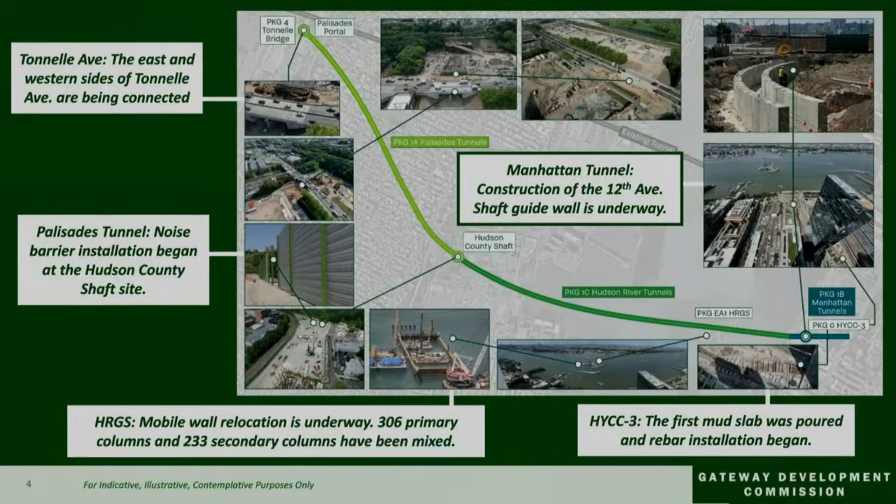Moving across the river, we come to the Hudson River Ground Stabilization Project. Relocation of the mobile wall within the cofferdam is nearing completion, enabling the team to access a new section in the riverbed. In Manhattan, the HYCC 3 team is wrapping up construction there.

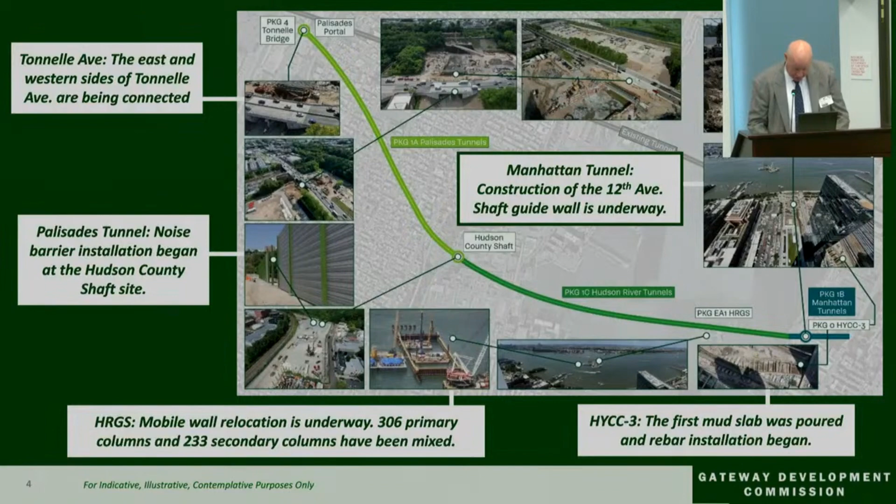Tunnel boring machine. This is an interesting part of the presentation for those of you that haven't been able to see a tunnel boring machine. We are rapidly approaching the start of tunnel boring for the Hudson Tunnel Project. With this major milestone on the horizon, I would like to use today's progress update to explain how these massive, complex machines work in building a tube tunnel and the process that will lead up to the start of tunnel boring next year.

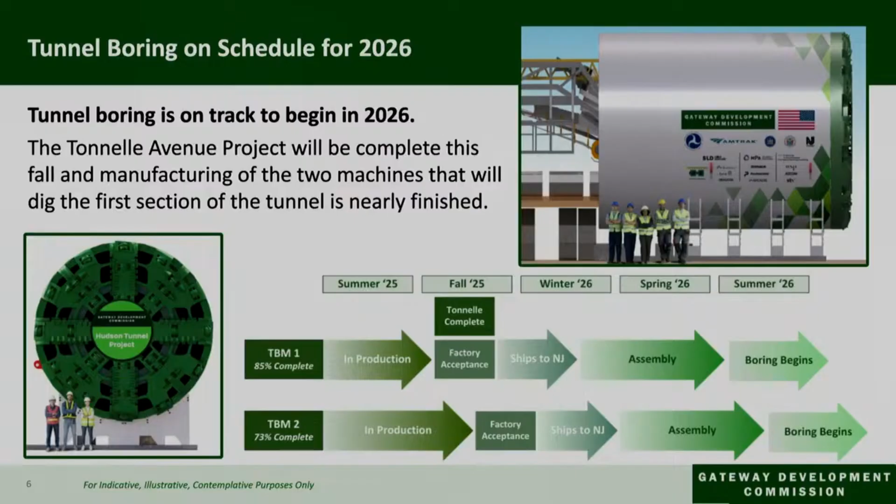Looking ahead, I am proud to say that both TBMs will be manufactured in November, and we are on track to begin tunnel boring in 2026. The first machine is now 85% complete, and the second machine, which will be offset by 200 feet, is 73% complete. These are massive machines, as you can see here, the characterization of the people standing next to them, because you don't get a feel for the size unless you actually stand next to one.

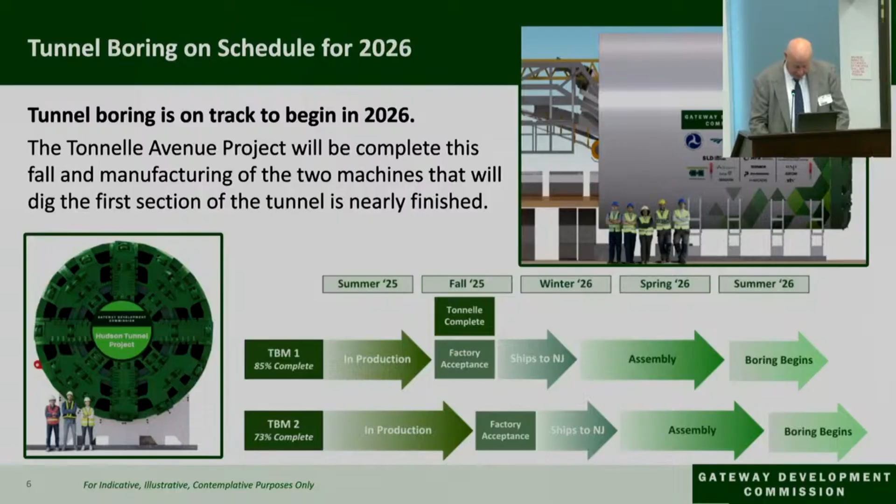The first of the 2 TBMs will be ready for launch by next summer, and the second will begin boring soon thereafter.

We are using single shield tunnel boring machines for the first mile of tunnel boring. This means the front of the TBM is a single continuous cylinder. This is the most efficient use of TBMs for boring through dry, hard rock conditions, like the rock underneath the Palisades, where the New Jersey section of the tunnel will be built. We will use 2 TBMs that are optimized for digging through a variety of conditions that we'll encounter under the Hudson River to dig that portion of the tunnel.

These machines are massive and extremely complicated. The Palisades cutter head is more than 28 feet in diameter, and each machine is longer than a football field, and they weigh more than 1,600 tons.

The size of the TBMs mean that they can build quickly. On days when the TBMs mining is underway, roughly 30 feet of tunnel will be built. At this rate, it will take about a year to complete both tubes in the Palisades.

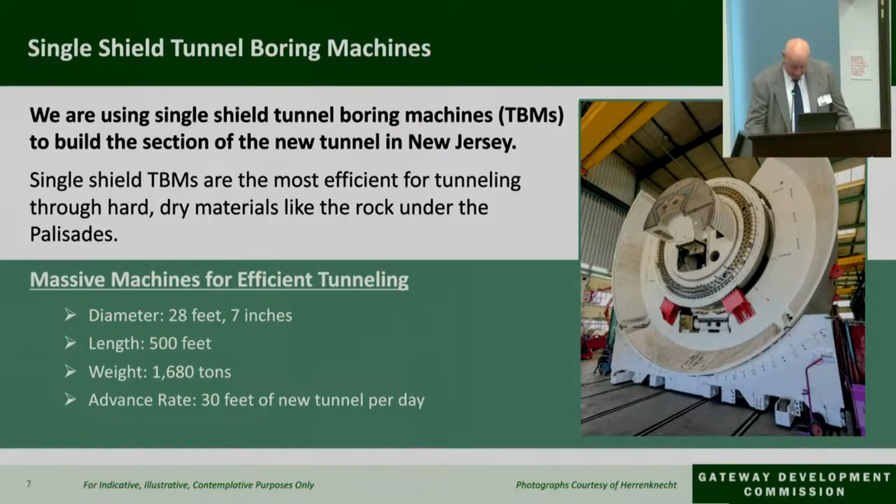TBMs are an all-in-one tunnel building machine. At the front of the machine, the cutter head breaks up the rock and earth into chips. These chips are then collected in buckets at the cutter head, where they will slide down chutes in the muck ring, which funnels them into a conveyor belt for removal to the rear of the tunnel boring machine.

As the tunnel boring machine advances, it installs new tunnel liner behind it in rings, and the section of tunnel that these two tunnel boring machines are building will be made up of roughly 1,700 rings. Once the tunnel liner is installed, the TBM moves forward by pushing off the edge of the existing liner that was put in place, using hydraulic thrust cylinders.

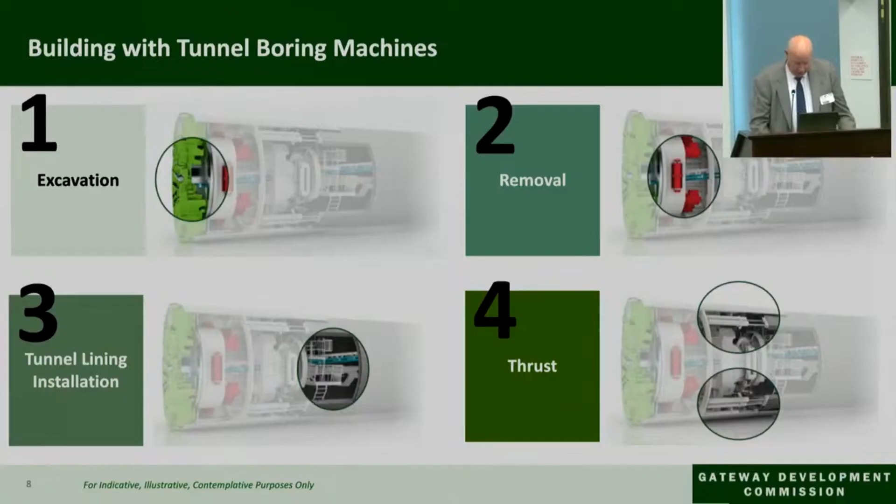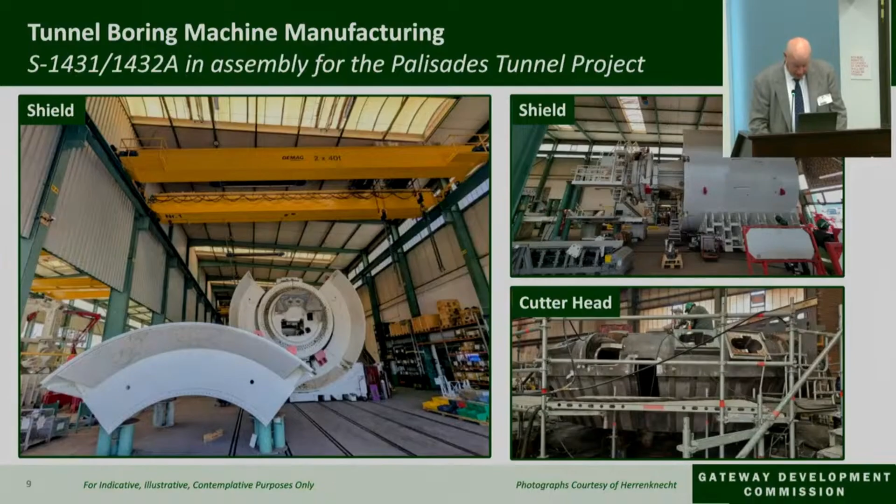These next 2 slides show the current production status of our TBMs. Both of the machines are on track to be finished this fall. Once factory production is finished, the machines will be tested and accepted locally at the site where they're being built, and they won't be shipped until they've successfully completed those tests. They will be assembled at the launch points in North Bergen at the Tonnelle Avenue site.

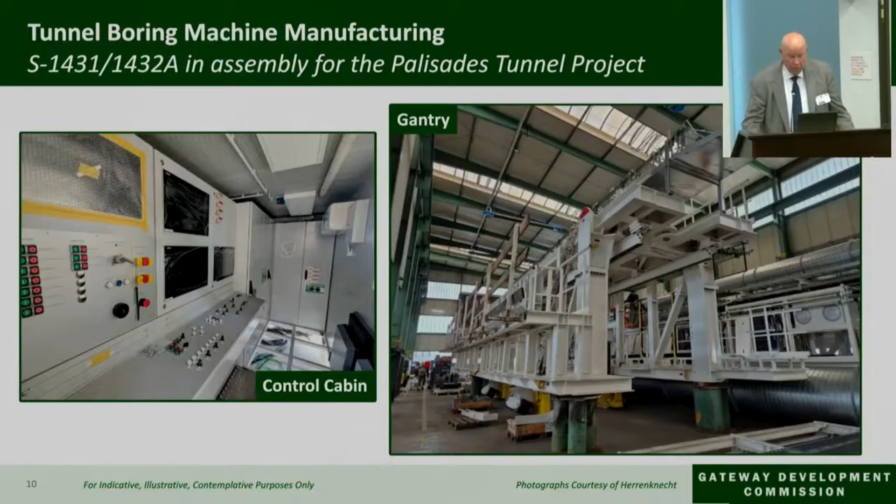Of course, building the TBMs is a massive undertaking, but it has also taken an incredible amount of work to get our construction sites ready for their arrival. For the past 2 years, we have worked to build the bridge under Tonnelle Avenue that will enable the TBMs to be put in place for assembly. Teams are working to prepare the launch point for the TBMs, digging a massive pit where they will be assembled in place when they arrive.

A mile away in Weehawken, which is the other side of the Palisades, work is already in progress to build the access shaft that will be used to remove the tunnel machines once they go through the Palisades tunnel portion of the project. The size of the shaft reinforces how large the TBMs are. It's roughly 130 feet across, and it's almost as long as an Olympic swimming pool.

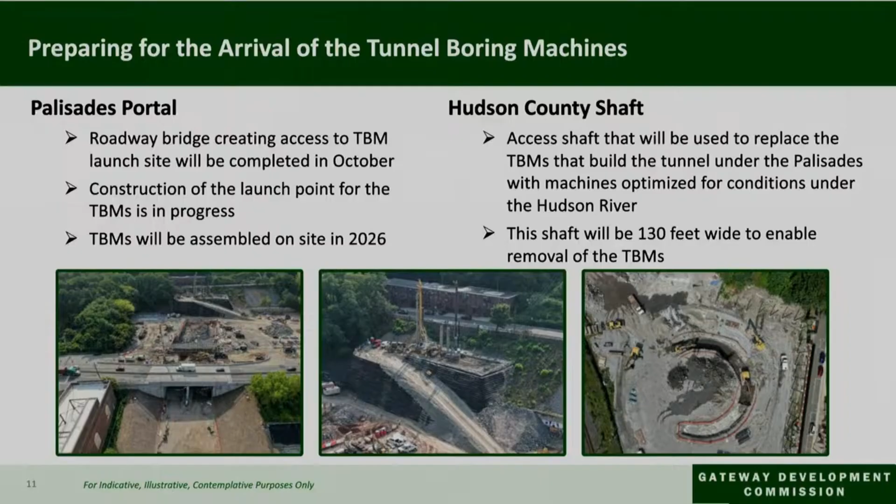The first action item on the board's consideration today is delegating authority to execute the project labor agreement for the New Jersey Surface Alignment Project.

Project labor agreements, as we've heard already from some of the speakers, are pre-hire collective bargaining agreements that create consistent, predictable rules for the terms and conditions of employment. We have PLAs on our contract packages and are supported by relevant legal required feasibility reviews, and we anticipate continuing to utilize them going forward throughout all aspects of construction. PLAs benefit workers and enable GDC to build efficiently by ensuring contractors have access to an experienced, well-trained pool of workers who can quickly mobilize.

The PLA for the New Jersey Surface Alignment Project establishes standardized work and pay rules, formalizes the process for unions to refer employees to work on the project, and creates a standardized procedure for resolving disputes to avoid work stoppages and inter-union jurisdictional disputes. All contractors and subcontractors who work on the project must comply with the PLA.

Contrary to some of the public comments received, it is our understanding that the shortlisted bidder in question works with one of the signatories to the PLA, Laborers Local 472. The PLA also permits any workforce outside of the signatories to, in fact, assent to the PLA.